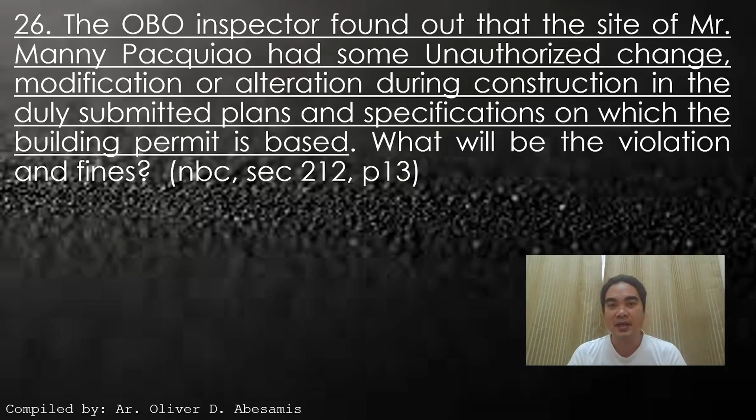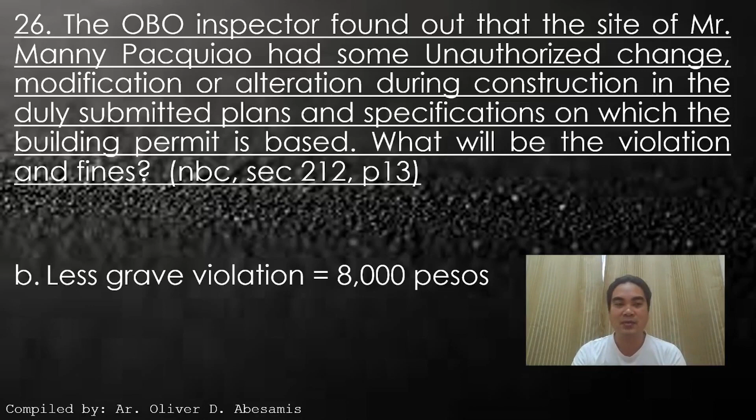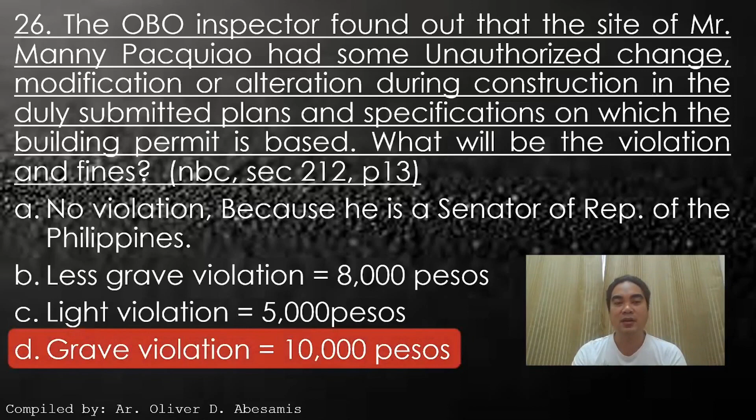26. The OBO inspector found out that the site of Mr. Manny Pacquiao had some unauthorized change, modification, or alteration during construction in the duly submitted plans and specifications on which the building permit is based. What will be the violation and fines? A. No violation because he is the Senator of the Republic of the Philippines. B. Less grave violation, 8,000 pesos. C. Light violation, 5,000 pesos. D. Grave violation, 10,000 pesos. Answer: D. Grave violation, 10,000 pesos. Okay?

32. The second floor slab was designed to resist fire for 2 hours as per NBCP Rule 6. What is the minimum overall thickness of slab and cover to reinforcement of the said slab? A. 150 mm overall thickness and 30 mm concrete cover. B. 100 mm overall thickness, 15 mm concrete cover. C. 120 mm overall thickness, 25 mm concrete cover. D. 125 mm overall thickness, 20 mm concrete cover. Answer: D. 125 mm overall thickness of the slab and 20 mm concrete cover for the reinforcement.

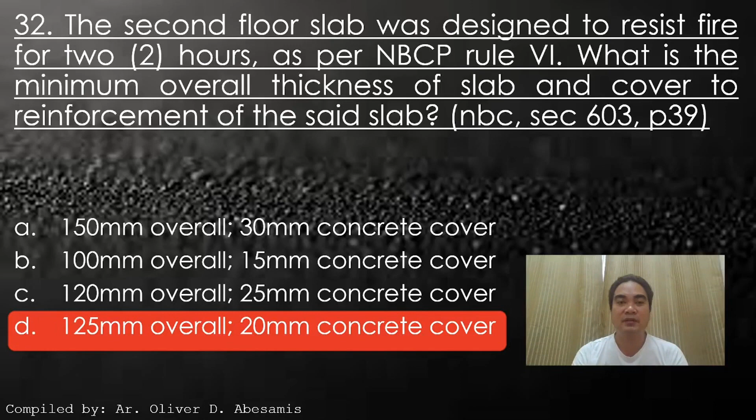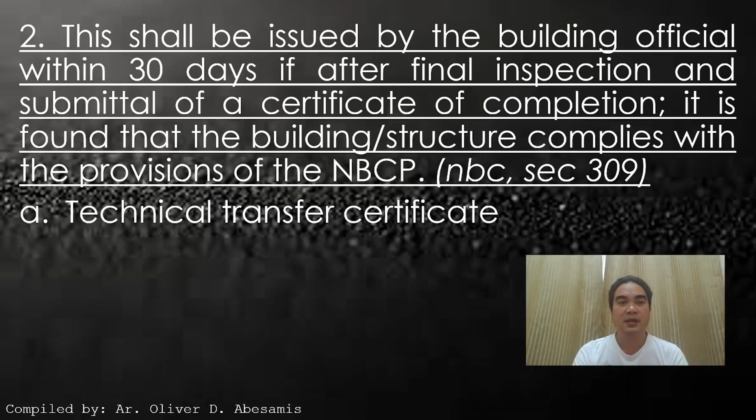Number 2. This shall be issued by the building official within 30 days if, after inspection and submittal of the certificate of completion, it is found that the building structure complies with the provisions of NBCP. A. Technical transfer certificate. B. Certificate of completion. C. Certificate of occupancy. D. Birth certificate. Answer: C. Certificate of occupancy.

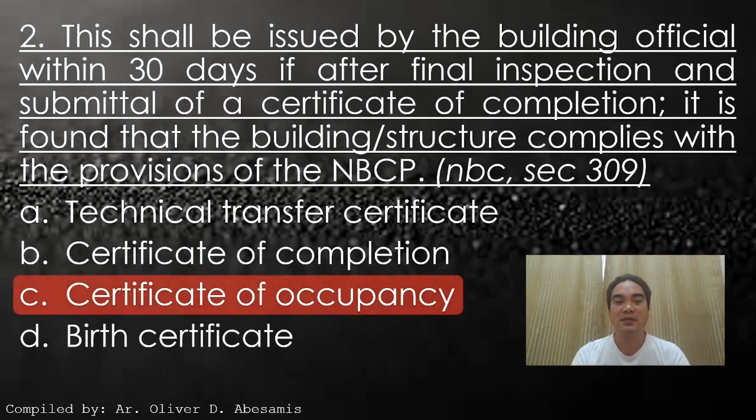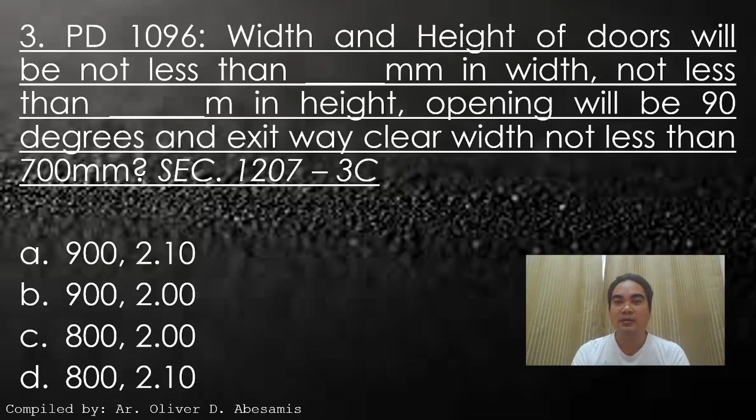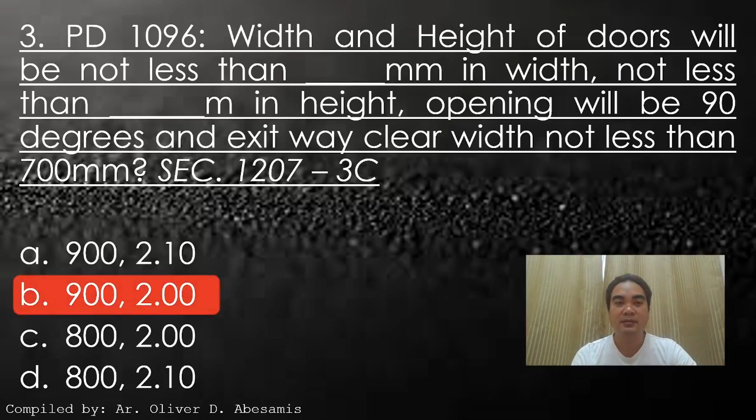Number 3. As per 1096, width and height of doors shall not be less than how many millimeters in width and not less than how many meters in height? Opening will be 90 degrees and exitway clear width not less than 700 mm. A. 900 mm, 2.10 meters. B. 900 mm, 2 meters. C. 800 mm, 2 meters. D. 800 mm, 2.1 meters. Answer: B. 900 mm, 2 meters in height.

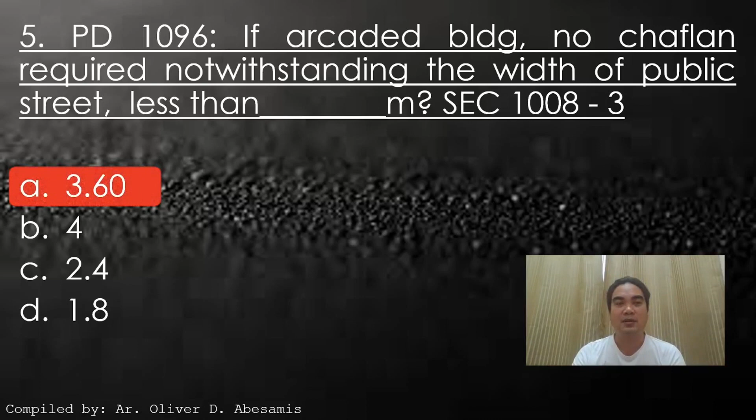Number 5, PD1096. If arcaded building, no chaflan is required notwithstanding the width of public street less than how many meters? A. 3.6 meters, B. 4 meters, C. 2.4 meters, D. 1.8 meters. Answer: A. 3.6 meters. Number 6. Spacing of rows of seats from back to back, not less than how many millimeters?

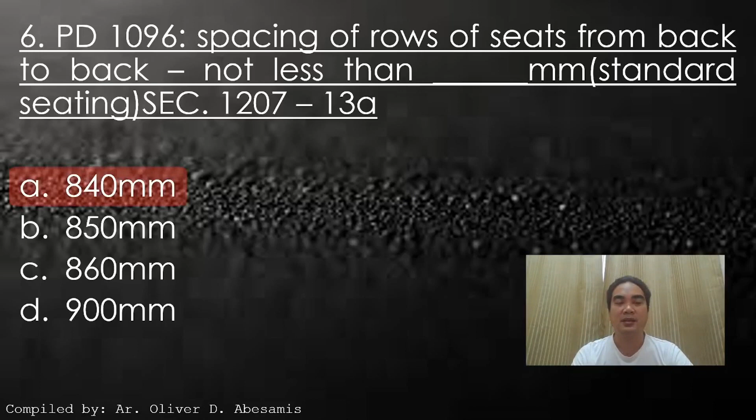A. 840 millimeter, B. 850 millimeter, C. 860 millimeter, D. 900 millimeter. Answer? A. 840 millimeter.

Number 7. If only 2 exits are required, these shall be placed a distance apart not less than how much of the perimeter area? Again, if only 2 exits are required, they shall be placed a distance apart not less than blank of the perimeter area. A. 1/3, B. 1/4, C. 1/5, D. 1/2. Answer? C. 1/5 of the perimeter area.

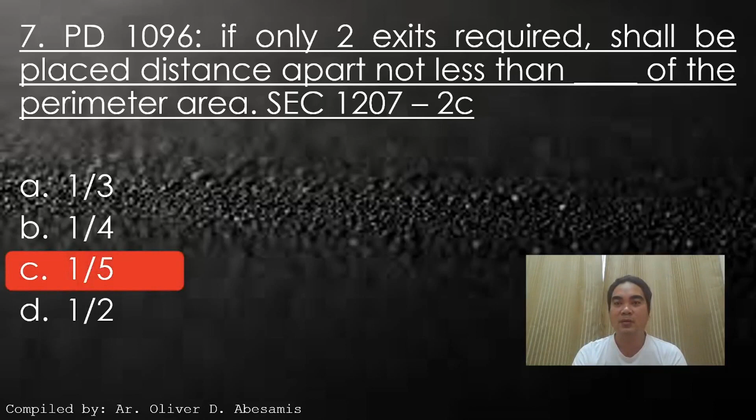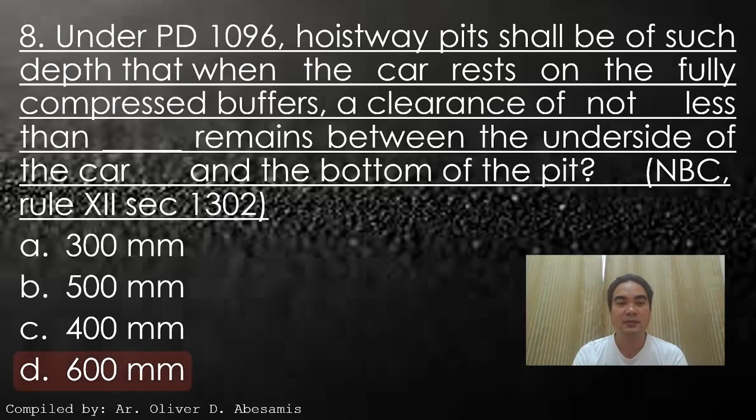Number 8. Under PD 1096, hoistway pits shall be of such depth that when the car rests on the fully compressed buffer, a clearance of not less than how much remains between the underside of the car and the bottom of the pit. Again, as per 1096, hoistway pits shall be of such depth that when the car rests on the fully compressed buffer, a clearance of not less than blank remains between the underside of the car and the bottom of the pit. A. 300 mm, B. 500 mm, C. 400 mm, D. 600 mm. Answer: D. 600 mm.

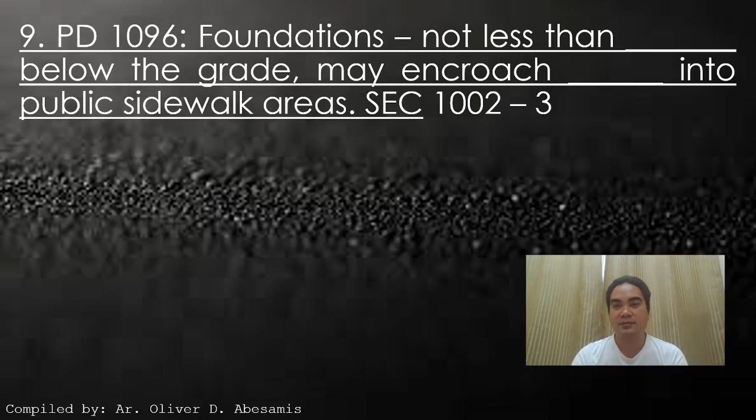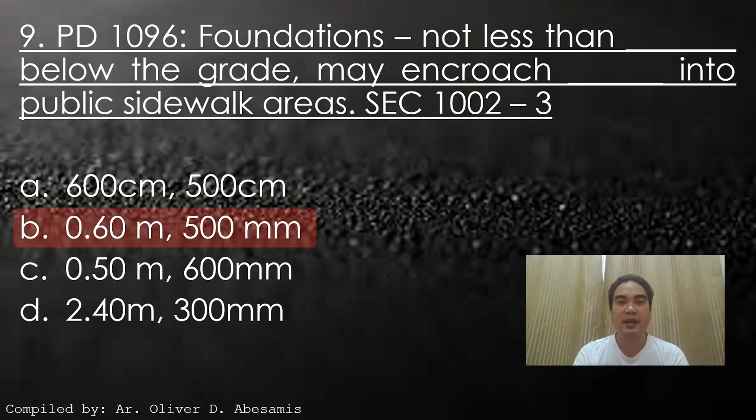Number 9. Foundations not less than blank below the grade may encroach blank into public sidewalk areas. A. 600 cm, 500 cm, B. 0.6 meter, 500 mm, C. 0.5 meter, 600 mm, D. 2.4 meter and 300 mm. Answer: B. The foundation not less than 0.6 meter below the grade may encroach 500 mm into the public sidewalk areas.

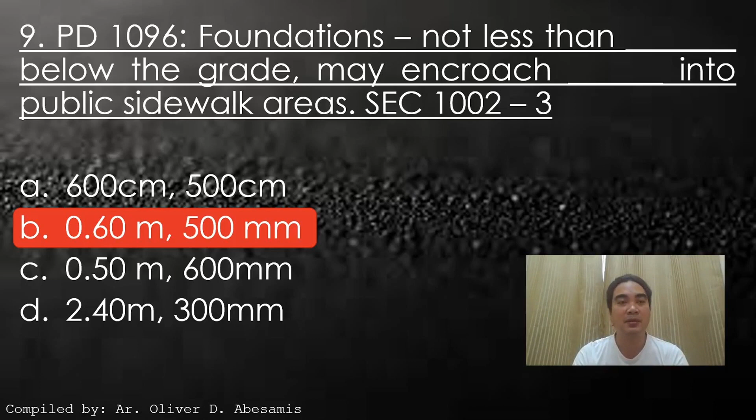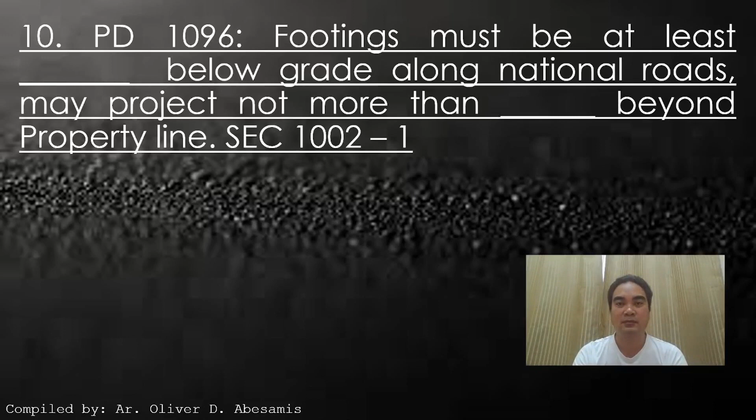Number 10. Footing must be at least blank below grade along national roads, and may project not more than blank beyond the property line. A. 600 mm, 500 mm, B. 2.5 meter, 300 mm, C. 2.3 meter, 400 mm, D. 2.4 meter, 300 mm. Answer: D. 2.4 meter, 300 mm. Footing must be at least 2.4 meter below grade along national roads, and may project not more than 300 mm beyond the property line.

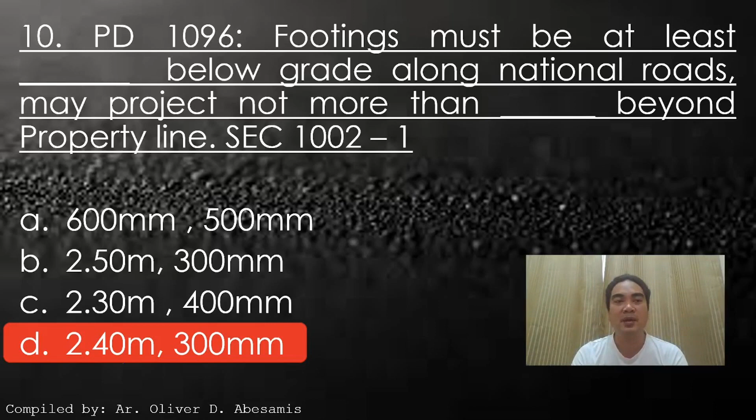Number 11. What type of construction is steel, iron, concrete construction with fire-resistant material of 1-hour fire-resistive rating? A. Type 5, B. Type 2, C. Type 4, D. Type 3. Answer: C. Type 4.

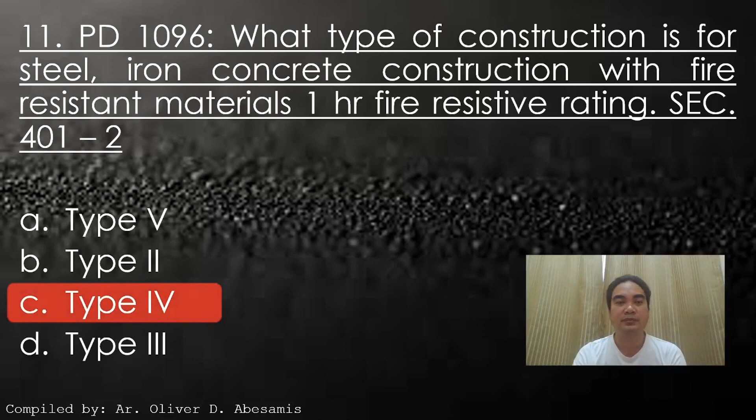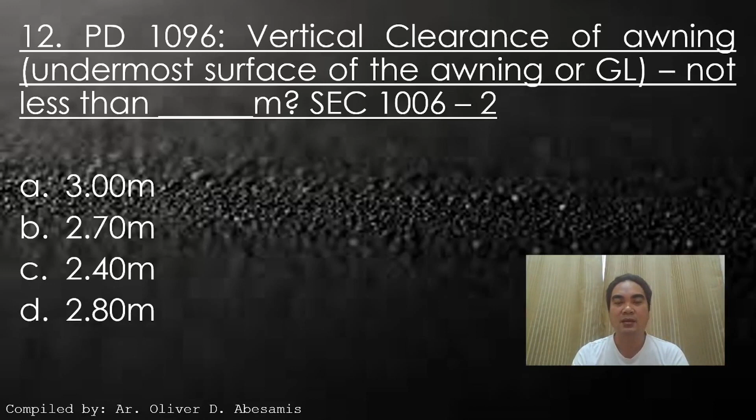Number 12. Vertical clearance of awning, from the undermost surface of the awning to ground level, not less than blank meter. A. 3 meter, B. 2.7 meter, C. 2.4 meter, D. 2.8 meter. Answer: C. 2.4 meter.

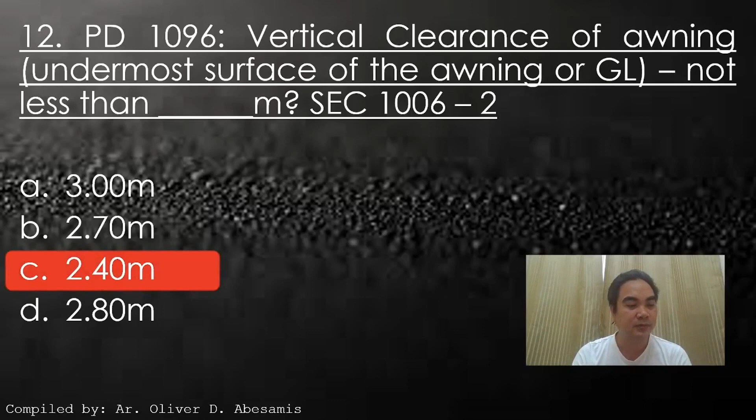13. The width of the stair, if the occupant load is less than 50, shall not be less than how many meters? A. 0.9 meter, B. 1 meter, C. 0.8 meter, D. 1.1 meter. Answer: A. 0.9 meter.

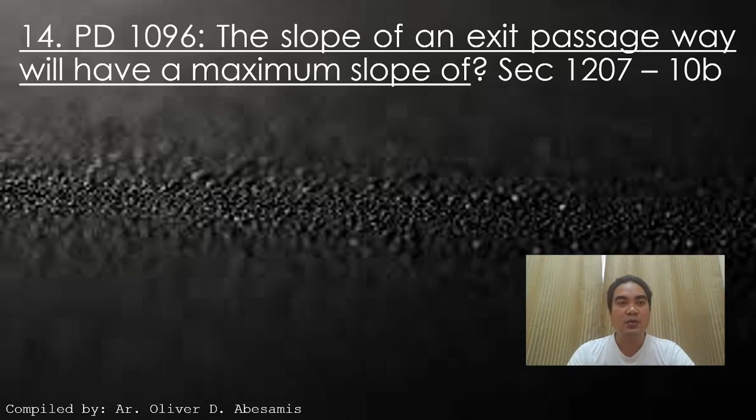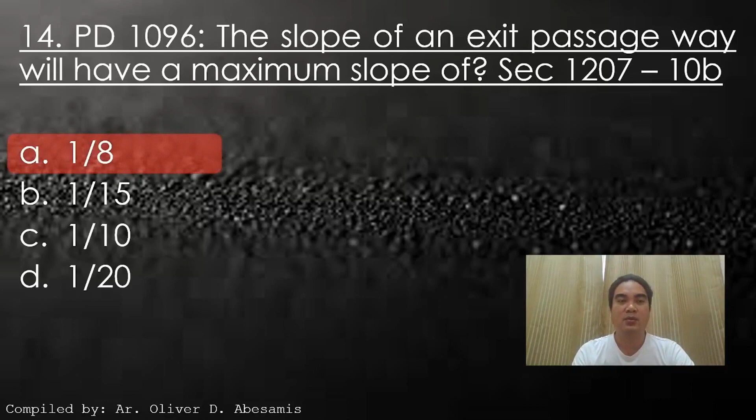14. An exit passageway will have a maximum slope of A. 1:8, B. 1:15, C. 1:10, D. 1:20. Answer: A. 1:8. 15. The rating in which a material can withstand fire. A. Fire resistive time period rating. B. Fire protective rating. C. Fire resistive rating. D. Fire respective rating. Answer: C. Fire resistive rating.

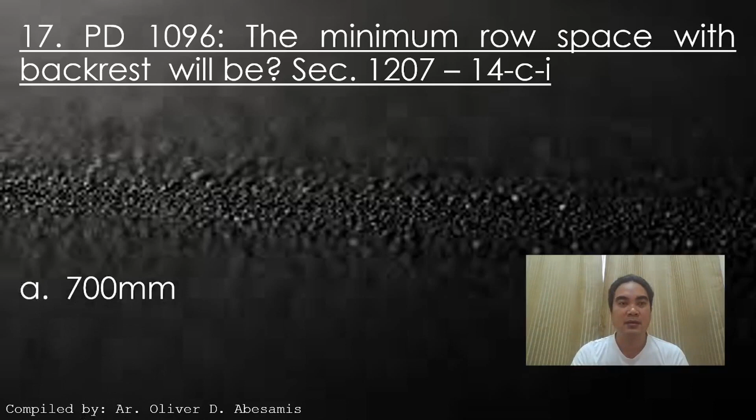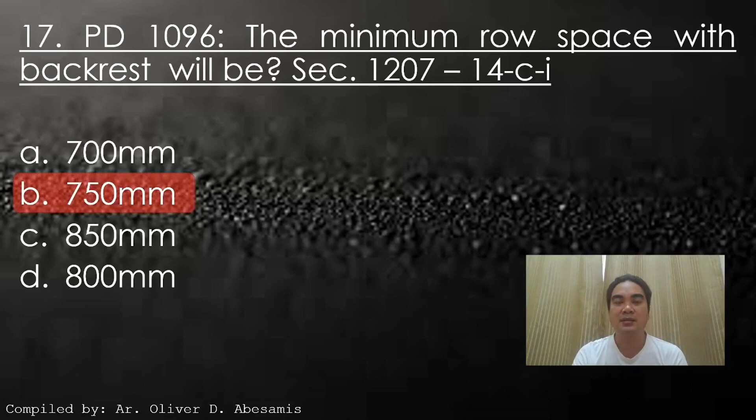16. The number of exits for a mezzanine with 185 square meter area or more than 18 meter in dimension will be: A. 1 exit, B. 2 exits, C. 3 exits, D. 4 exits. Answer: B. 2 exits. Number 17. The minimum row spacing with backrest will be A. 700 mm, B. 750 mm, C. 850 mm, D. 800 mm. Answer: B. 750 mm.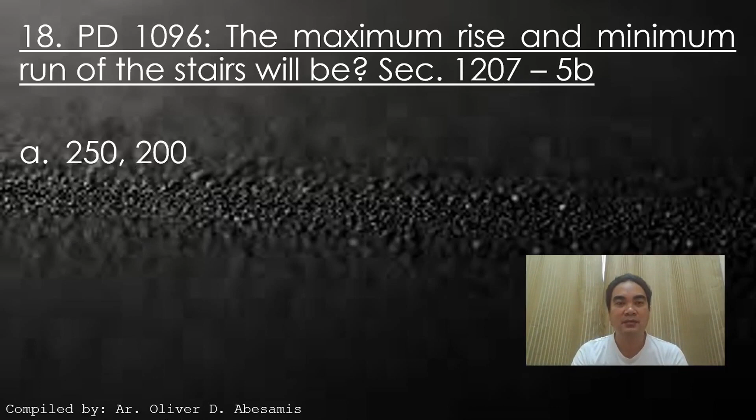18. The maximum rise and minimum run of stairs will be A. 250, 200. B. 200 mm and 250 mm. C. 200 mm, 300 mm. D. 250 mm and 250 mm. Answer: B. The maximum rise is 200 mm and the minimum run is 250 mm. 19. The headroom clearance for a stair will be A. 3.6 meter, B. 2 meter, C. 2.5 meter, D. 2.7 meter. Answer: B. 2 meter.

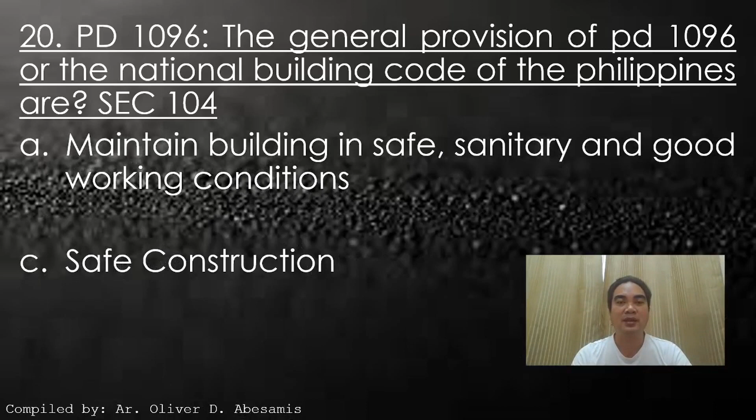20. As per PD 1096, the general provisions of PD 1096 or the National Building Code of the Philippines are: A. To maintain buildings in safe, sanitary, and good working condition. B. Adequate environmental safeguards. C. Safe construction. And D. All of the above.

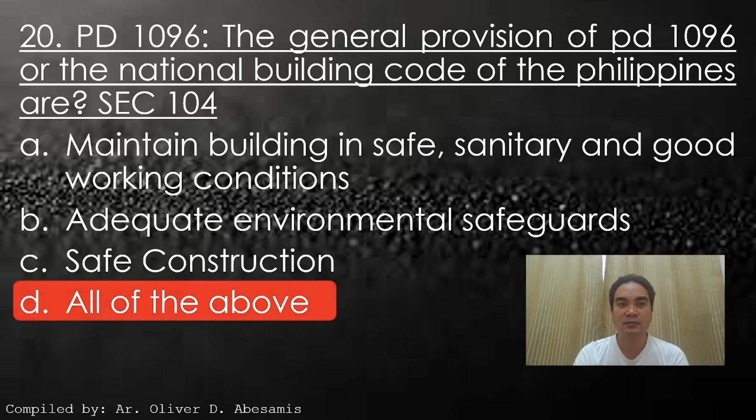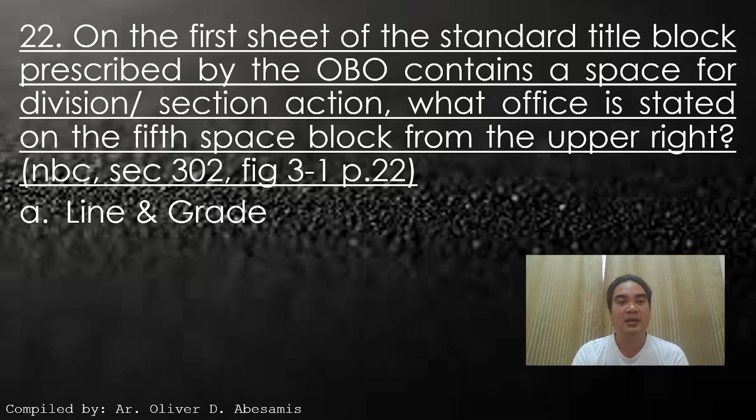Answer: all of the above. 22. On the first sheets, the standard title block prescribed by the OBO contains spaces for division section action. What office is stated on the fifth space block from the upper right? A. Line and grade. B. Architectural. C. Civil structural. D. Mechanical. Answer: C. Civil structural. That is for the fifth space block.

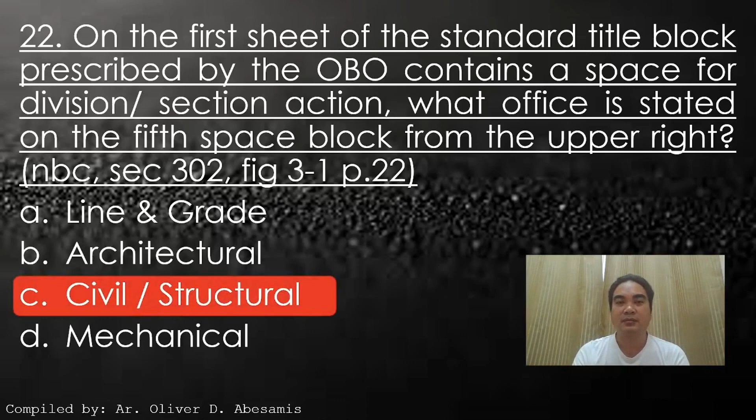23. As per PD 1096, the door that shall swing in the direction of exit travel when serving any hazardous area or when serving an occupant load of 50 or more. A. Exit door. B. Double acting door. C. Emergency door. D. Panel door. Answer: A. Exit door.

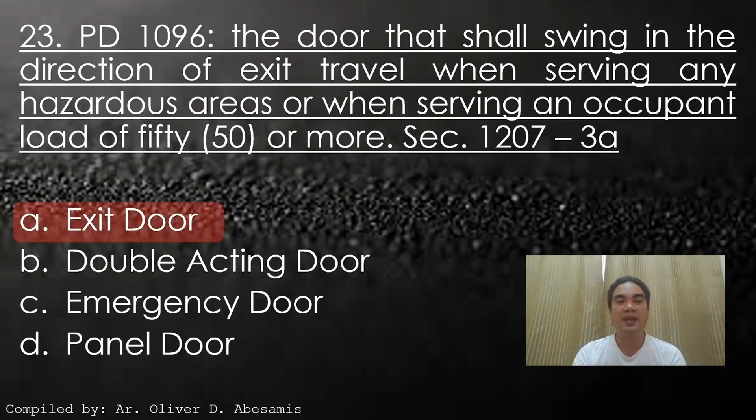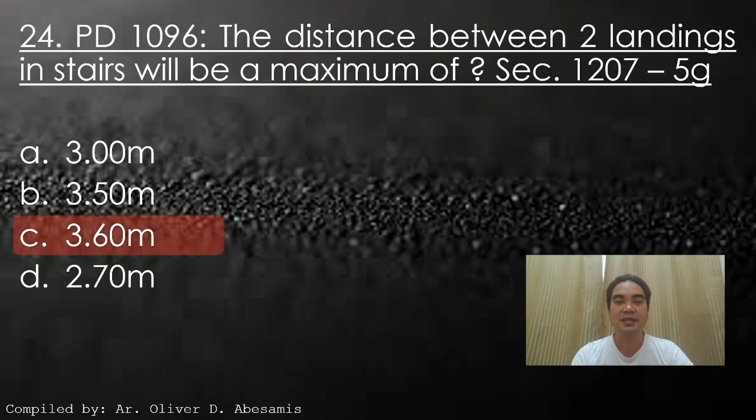24. The distance between two landings in a stair will be a maximum height of A. 3 meter, B. 3.5 meter, C. 3.6 meter, D. 2.7 meter. Answer: C. 3.6 meter.

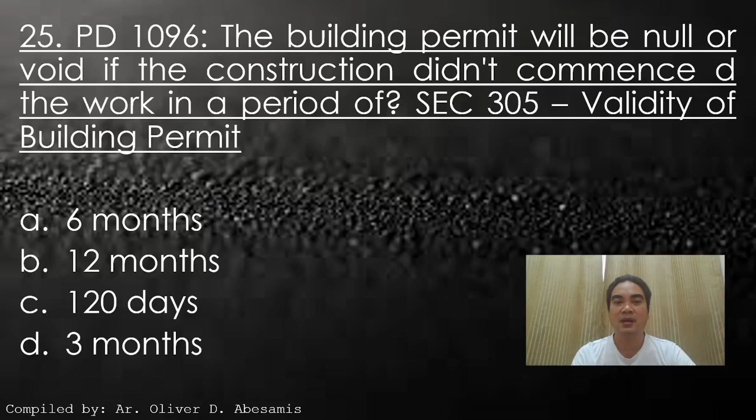25. The building permit will be null or void if the construction did not commence the work in the period of A. 6 months, B. 12 months, C. 120 days, D. 3 months. Answer: B. 12 months.

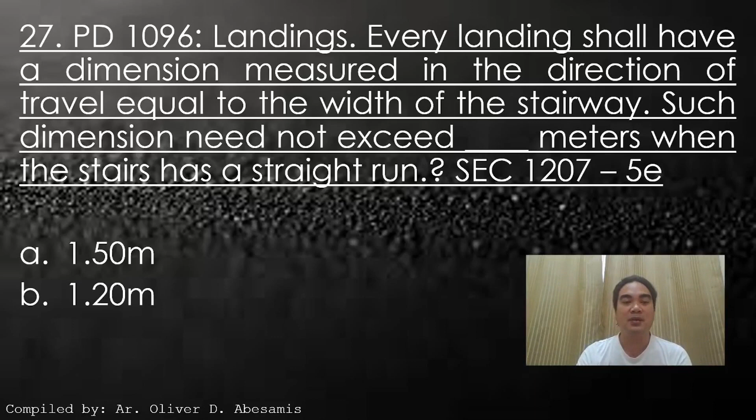27. As per PD 1096, landings: every landing shall have a dimension measured in the direction of travel equal to the width of the stairway. Such dimension need not exceed blank meter when the stair has a straight run. A. 1.5 meter, B. 1.2 meter, C. 1.4 meter, D. 1.3 meter. Answer: B. 1.2 meter.

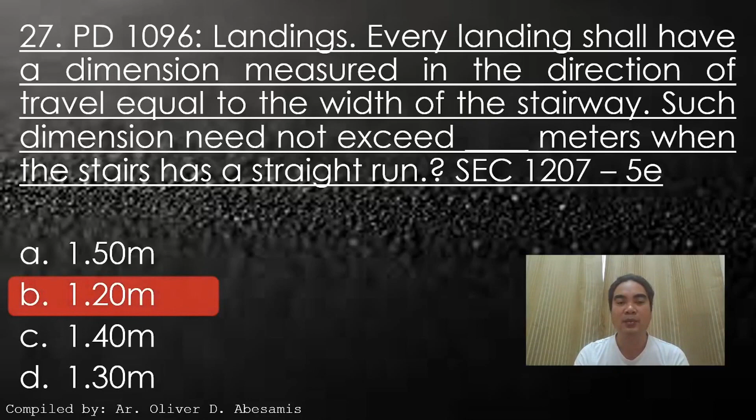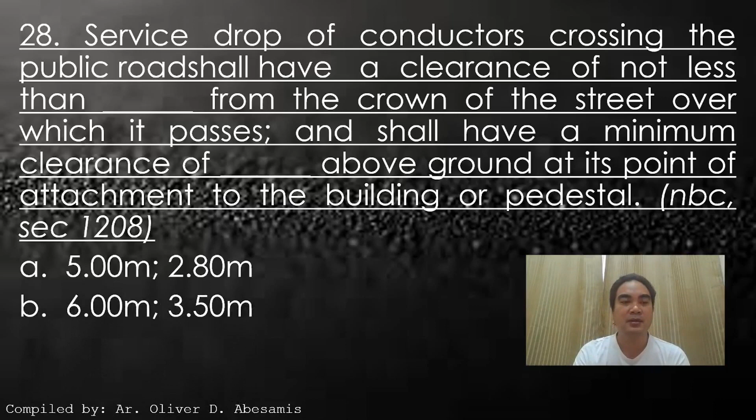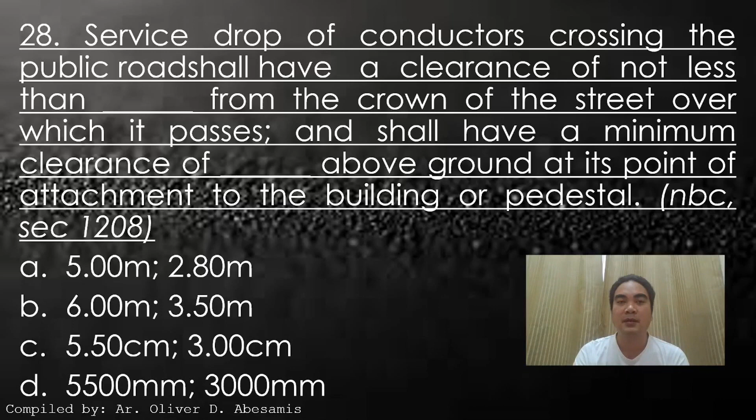28. Service drop of conductors crossing the public roads shall have a clearance of not less than blank from the crown of the street over which it passes, and shall have a minimum clearance of blank above ground at its point of attachment to the building or pedestal. A. 5 meter, 2.8 meter, B. 6 meter, 3.5 meter, C. 5.5 centimeter, 3 centimeter, D. 5,500 millimeter and 3,000 millimeter. Answer: D. 5,500 millimeter and 3,000 millimeter.

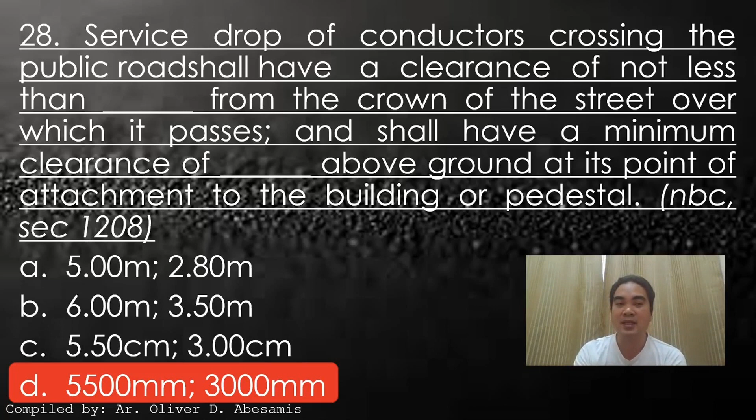Service drop of conductors crossing the public road shall have a clearance of not less than 5,500 millimeter from the crown of the street over which it passes, and shall have a minimum clearance of 3,000 millimeter above ground at its point of attachment to the building or pedestal. 29. Side aisles width will be a minimum of A. 1 meter, B. 1.1 meter, C. 1.2 meter, D. 1.3 meter. Answer: B. 1.1 meter.

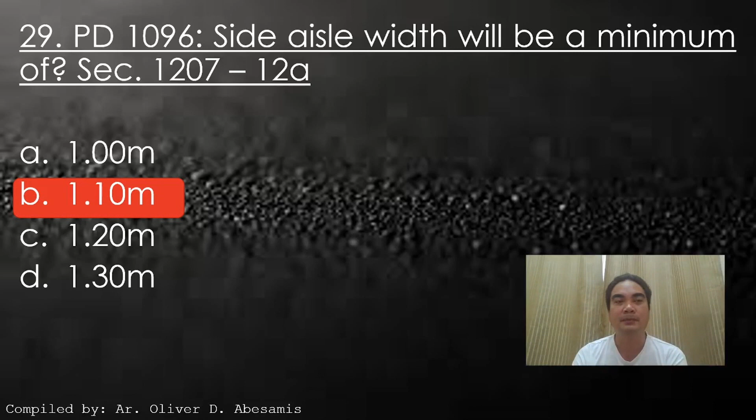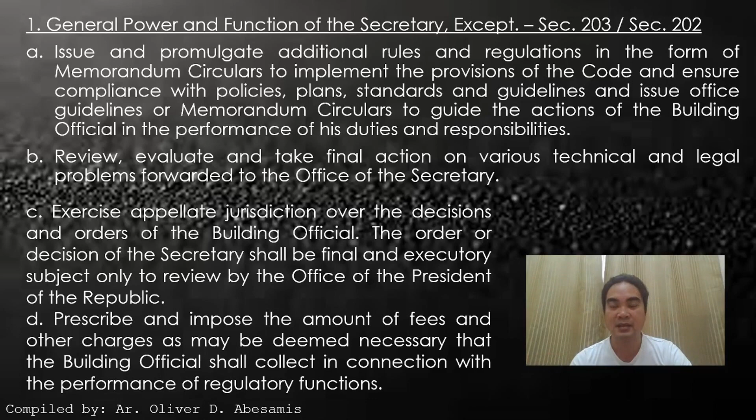D. Prescribe and impose the amount of fees and other charges as may be deemed necessary that the building official shall collect in connection with the performance of regulatory functions. So, from the list, what is the general function of the Secretary except? Answer: B. Review, evaluate, and take final action on various technical and legal problems forwarded to the Office of the Secretary. This is the role of the technical staff.